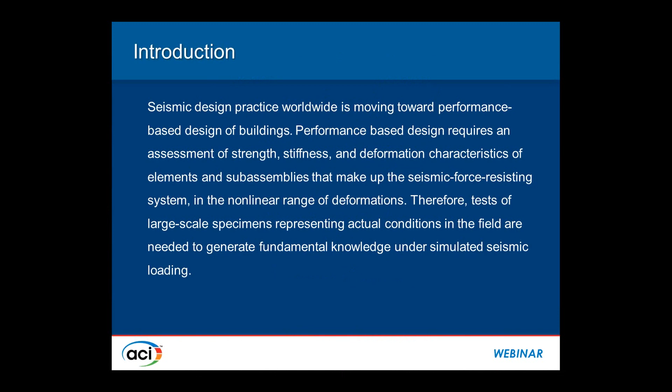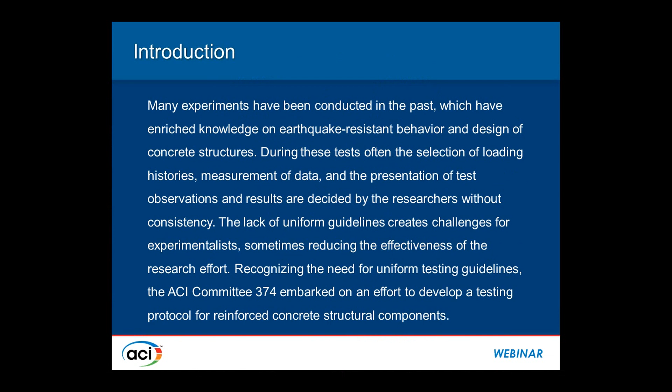Now, it is certainly not intended to restrict researchers to these guidelines. The intent is to increase the effectiveness of the tests and perhaps avoid repeating the same tests, because some information may be missing that could be vital for design and detailing of a specific element, and also to present results in a manner that can be interpreted easily and linked to these performance levels. So the intent is to increase effectiveness while recognizing that each research project is unique and different, and researchers certainly have and should have the freedom to do their tests the way they see fit. But if they do follow some of the recommendations and pay attention, the hope is that the outcome will be more usable by the profession at large.

When we look at testing for earthquake effects, we can essentially group these tests under three different categories. The first one, which forms the basic focus of this document, is testing under slowly applied, incrementally increasing or decreasing quasi-static loads or deformations. The second one is pseudodynamic testing.

Pseudodynamic testing involves a combination of dynamic action, where one conducts dynamic analysis during the test and records or computes deformations imposed on a specific test specimen, applies that deformation in the lab, records resistance or stiffness, then feeds that back into the computer program for the next step of analysis. This is an interactive method of introducing dynamic effects into static testing.

Whereas slowly applied static or quasi-static testing has the advantage of allowing researchers to test large-scale specimens, with given time to slow down or stop testing, make observations, mark cracks, get pictures, record data, and continue. The word slow here implies there will be no inertial effects associated with fast loading or accelerations, and no strain rate effects, as under increased high strain rates, often in the case of blast loading, material capacity goes up and gives a different response. Those two effects are eliminated under slowly applied loads.

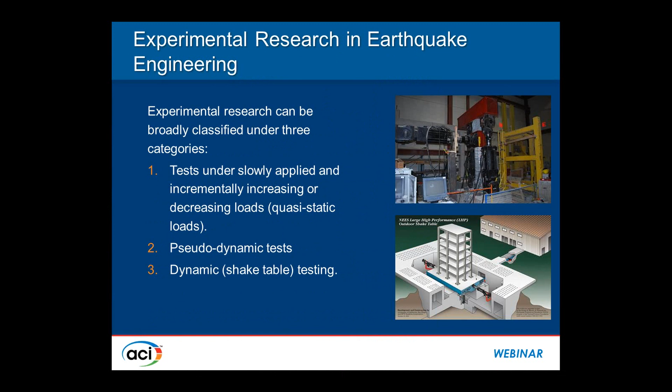At the other extreme of the scale, number three is shake table testing. This is intended to simulate actual ground shaking through shake tables, and that is also a very useful and valid way of testing, with its own challenges. But among these three, we will concentrate on slowly applied quasi-static loads.

Hence, the scope includes testing recommendations for this type of test method. It concentrates on structural elements and does not deal with non-structural elements. Emphasis is placed on characterization of the force deformation relationship.

We often generate a hysteretic relationship under reverse cyclic loading, and this relationship tells you the basic characteristics of the structural element in terms of stiffness, strength, and strength decay or stiffness decay under cyclic loading. I will elaborate on these aspects a little later, but one has to be conscious of that and pay attention to proper recording of the hysteretic relationship.

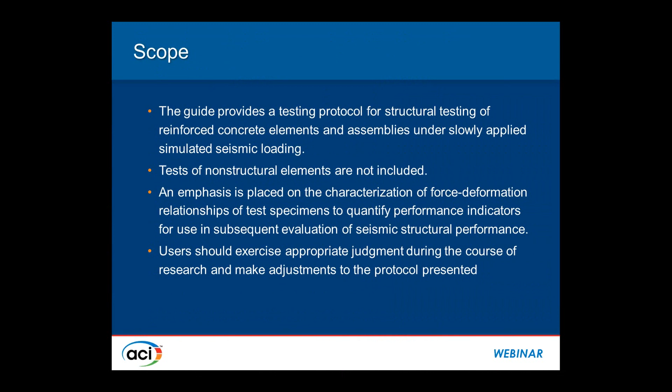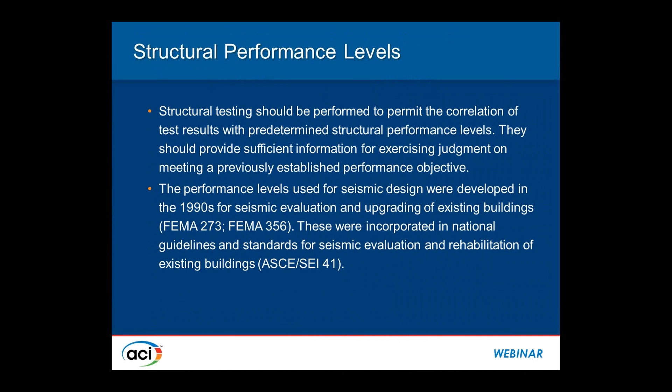I'd like to say a few words on structural performance levels, because this entire test protocol is intended to utilize performance-based design. Performance-based design is an evolving field, but that doesn't mean we haven't established some performance levels, although they are being updated and changed all the time. The committee had extensive discussion on which set of performance levels we should adopt in this document, but it became clear very quickly that there is a set of performance levels already accepted by the structural engineering community, developed in the 1990s and included in FEMA 273 and FEMA 356 documents, and recently adopted by ASCE 41.

These performance levels essentially reflect four different levels of damage states, and each level is associated with the expected use of the building. The first one is operational - the intent is that during and after the earthquake, the building will be operational, typically as it would be in post-disaster buildings like hospitals. You certainly want to continue operating the hospital during and after the earthquake, so this is a valid performance target for designing a hospital, for example.

There may also be immediate occupancy, meaning after the building is inspected following the earthquake, you will be able to immediately occupy it. The next level is life safety - here, as the name implies, we are more concerned with saving lives rather than the structure. The structure may or may not be repairable, but the ultimate aim is life safety.

Obviously, the stringency in design and detailing is a function of how far we want to push the structure, how much additional damage we can tolerate, and there's a cost associated with that. So it's this balance between expected level of performance, stringency in design, and hazard as defined by earthquake intensity that forms the framework of performance-based design.

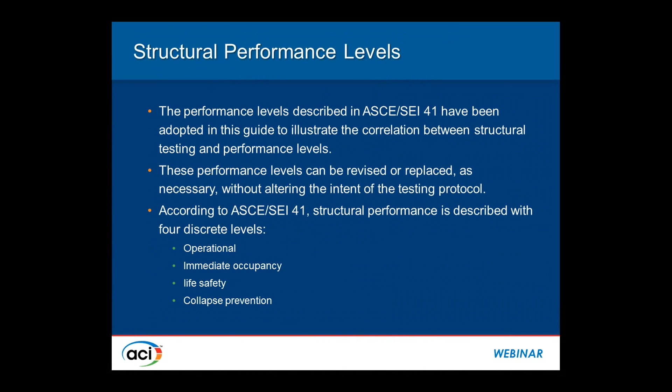And the last performance level is collapse prevention, where the structure becomes essentially unusable but still not collapsing, so that we may be able to vacate the occupants.

It's best to describe this with some numbers. Those of us doing these tests will appreciate these values. Although it's difficult to give exact numbers, I think expressing or relating these performance levels to some well-accepted damage indicators, such as drift ratio, is valuable.

In the case of frame buildings, where there is substantial flexibility in the earthquake-resisting system, the operational performance level is limited to minor hairline cracking, and we certainly do not expect any permanent deformation. This is earlier, maybe around 0.5% drift, within the effective elastic range. Here, when we refer to elastic range, we mean to say the effects of cracking are included, so it's really the effective elastic range.

Immediate occupancy can go up to the onset of yielding, and this is the limit of the effective elastic range, beyond which we start experiencing permanent deformations. Immediate occupancy in a frame building can go up to 1% drift, and this depends on the level of axial load and the type of structural layout. But we're talking about giving an overall feel for these performance levels at this stage.

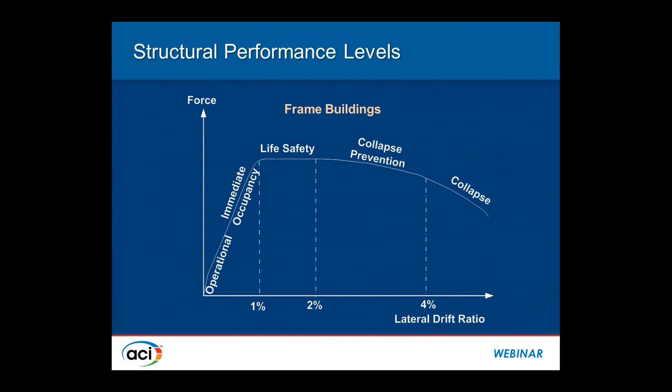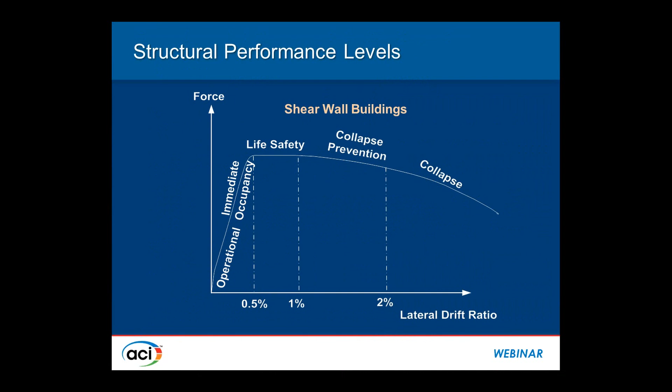Now, when we look at a more rigid structure, like shear wall buildings, shear walls are more stiff elements, and hence there will be less deformation, and yielding will be triggered earlier, as early as 0.5% drift. So the levels of performance typically occur at smaller deformation levels: 0.5% is the onset of life safety, 1% is onset of collapse prevention, and we can go up to 2% drift.

If we know this information before we do our tests, then we know what we're looking for, and we want to display the outcome of the tests in such a way that they can be linked to performance-based design. But if we did not look at some of the performance indicators, then perhaps we will not be able to document our test results. So this is really the intent here.

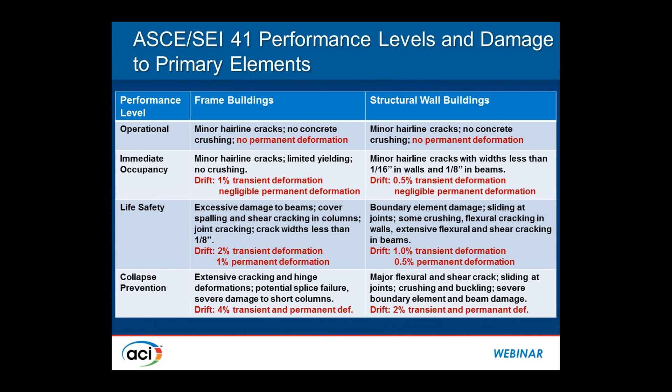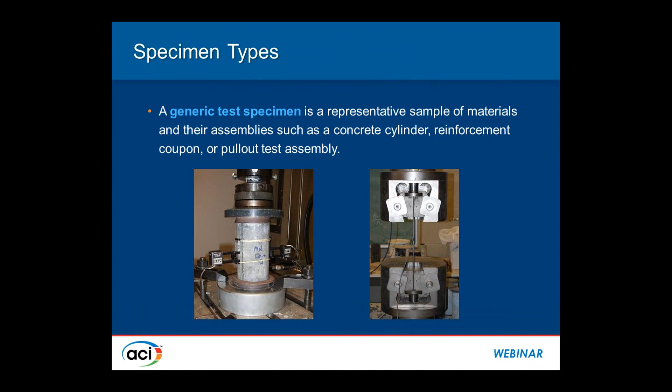In terms of types of specimens, we have categorized these as generic test specimens and specific test specimens. Generic test specimens are typically standard tests that we use to establish material properties. Here you see ASTM standard tests for concrete cylinders and steel coupon tests. But we go beyond that.

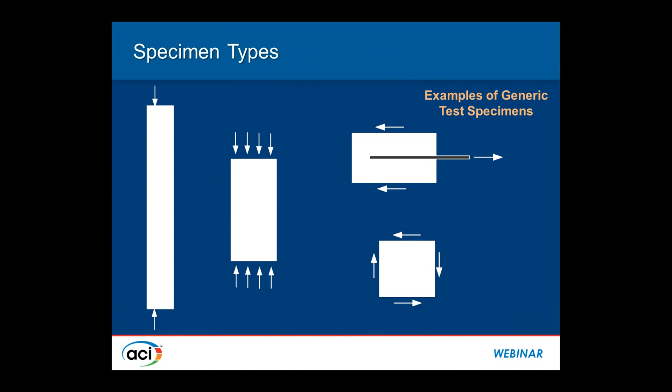Then you can have specimens loaded, typically prisms or even small columns, to study, for example, the effect of confinement. Again, we're looking at confinement effect, not necessarily overall column behavior. The one on the left highlights, for example, a column under eccentric loading. If I want to study behavior of concrete only in the compression zone, I can adjust this eccentricity such that the neutral axis would be on the rightmost edge of the specimen. So these are essentially to focus on specific phenomena in a generic test specimen.

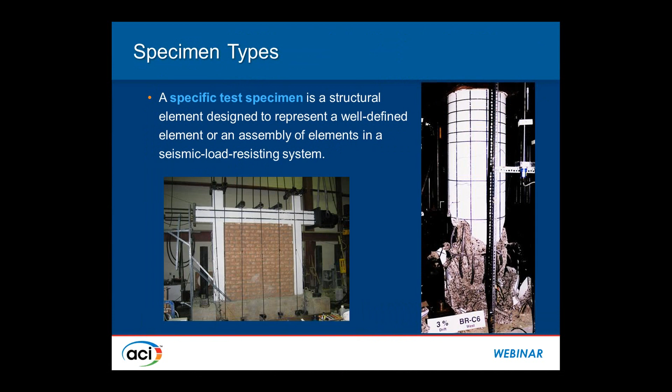Whereas specific test specimens are intended to simulate well-defined elements, sub-assemblies or assemblies. Here you see a small scale, but still relatively large to prevent size effects: a single-story, single-bay frame with infill masonry walls, subjected to reverse cyclic loading. On the right-hand side, you see a column, and this can be a full column or a column between footing and point of inflection, the cantilever portion, or it could be a bridge column. Here, for example, the effect of tie spacing is investigated. So this is done on a specific structural component.

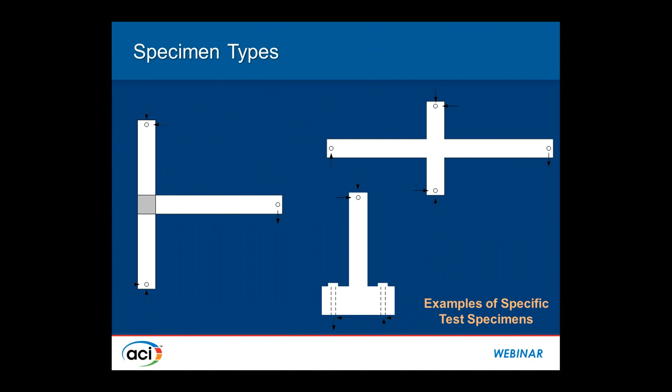Other examples include beam tests, beam-column connections, and there could be shear walls, coupling beams. These are essentially components isolated from the rest of the structure to study their behavior.

Material testing has to be done before the actual structural testing. One needs to know stress-strain characteristics of concrete and reinforcing steel, because this information will be very valuable during and after the test.

In terms of concrete, we take cylinder tests as recommended, often at 7 days and 28 days, but these days may not coincide with the actual test date. Hence it is good practice to establish a strength versus age relationship by testing cylinders at different ages, so that one can predict actual material capacity on the day of structural testing.

But as a minimum, one has to report compressive strength of concrete and yield strength of steel. Obviously, this is bare minimum information needed to interpret test data and assess the results.

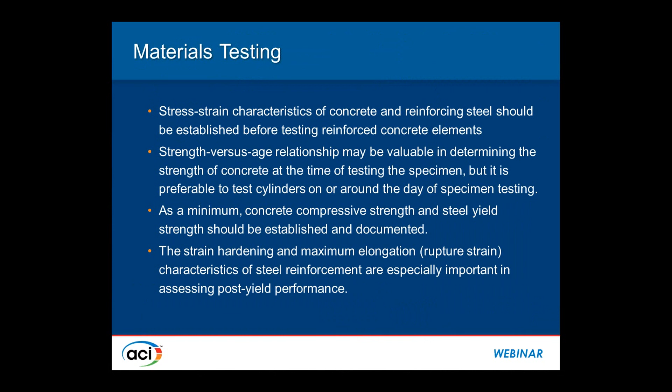The type of tests we are doing for earthquake design involves excessive deformations in inelastic response, and hence it's advisable to capture the strain hardening portion of reinforcing steel. This is important because we will look at plastic hinges during which reinforcement does go into the strain hardening range.

In terms of preparing test specimens, one has to pay attention to the boundary conditions and support conditions, and the way loads are applied and the types of loads that are applied. Obviously, to the extent possible, we should approach full size as much as possible.

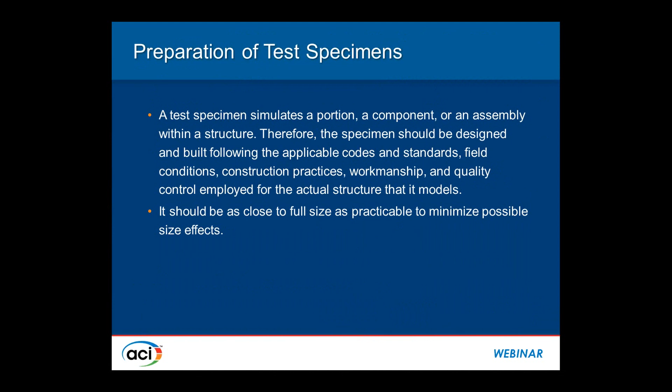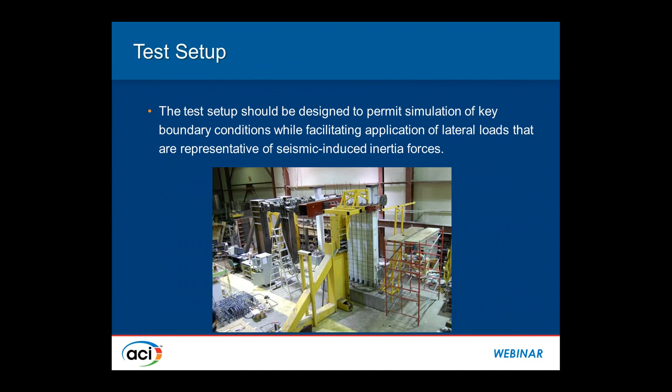The lateral load is applied through actuators, often located where you expect your mass, where the floor is. We often restrain out-of-plane deformations because in a real structure there will be other structural components and perhaps rigid floors, making sure the structure behaves in plane. So these boundary elements and support conditions have to be well thought out and simulated during testing.

Other examples of lateral load application: here you see actuators applying load, and it can either be in force control mode or deformation control mode, as I will expand on later when I discuss loading regimes. You can control these actuators either in force control or deformation control mode.

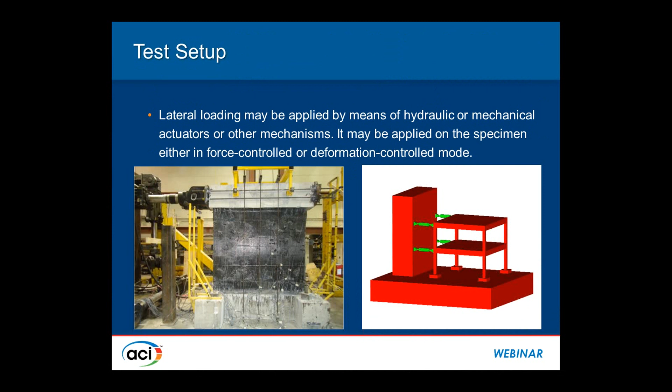You can either simulate a single floor where the inertia mass will be, or if you have a two-story test frame, as you see on the right-hand side, you may choose to apply forces at each floor level as indicated.

One other important concept that should not be forgotten when selecting a specimen, how it is isolated from the rest of the structure and tested with proper support conditions and loading, is axial load.

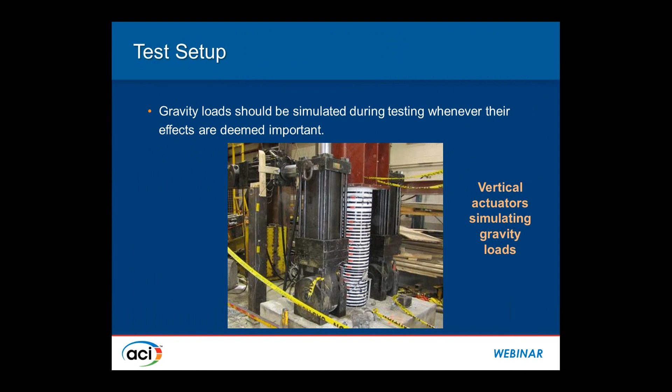Columns obviously have to be tested under simulated gravity load, and this can be done by applying the load with vertical actuators, or sometimes the specimen itself may lend itself to application of vertical pre-stressing. This is a convenient way of applying axial load, so long as one keeps track of changes in the pre-stressing force, because under reverse cyclic loading, one side may lose a little load while the other gains a little. So long as this is monitored, it's a convenient way of applying axial load.

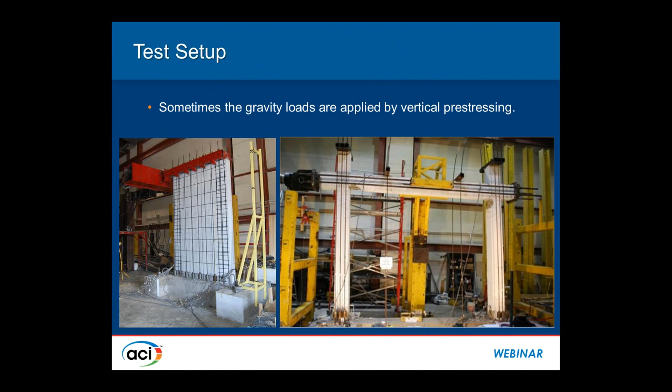Now, axial load does have a very significant effect on performance of these specimens. Where we are concerned with ductility, axial load tends to reduce it, because concrete becomes more dominant in the response, and that has to be considered.

When we look at a typical force-deformation hysteretic relationship, the effect of axial load has to be clearly identified. In a real building, axial load is vertical in nature, but in testing, often we connect the lower end of the actuator to a strong floor and pull the specimen down, which means the axial load direction will change during testing. This is also true if we use vertical pre-stressing to apply axial load.

One has to be conscious of the fact that the axial load inclination will always change, and make sure that when we report the vertical component of axial load, we perhaps subtract the horizontal component of axial load from the force recorded by the horizontal actuator, because the difference is what the specimen is actually seeing.

So with and without this P-delta moment, the behavior will change significantly. If you're presenting moment-drift relationship or moment-displacement relationship, one should remember that this moment consists of two components: the horizontal force times the shear span FL, plus axial force times the deflection, which will vary during testing.

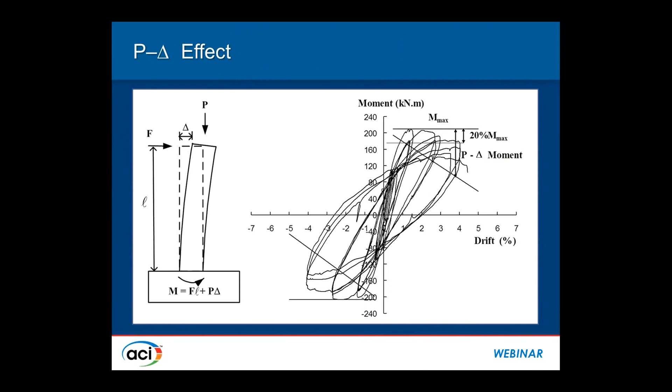If you do ignore this effect and plot only F, there will be a higher rate of strength degradation, which may or may not be misleading, because some of the moment will be used up by P-delta. In other words, some of the capacity of this column is resisting P-delta moment, the rest is resisting FL, and that has to be identified.

In terms of instrumentation, we have to instrument the specimen such that the performance indicators we've been talking about are clearly obtainable from these tests. If we talk about drift as a performance indicator, one has to obviously measure displacement, from which we can get drift.

One common mistake is not capturing deformations associated with anchorage slip or the extension of reinforcement into the attached member. If this is a column, the reinforcement extends into the foundation, and when plastic hinge forms and yielding occurs, yield penetration takes place, and the reinforcement inside the footing starts elongating, causing significant softening in the member. This has to be recorded by placing vertical LVDTs as close to the bottom section as possible, because this extension of reinforcement, and hopefully not complete slip but some local slip, will result in a wide crack at the member intersection, and that will certainly affect your drift.

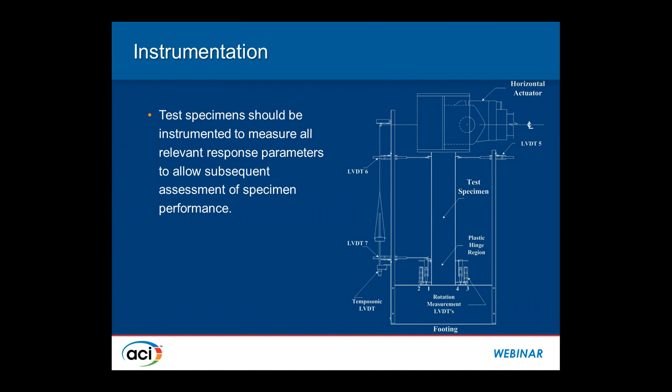So plastic hinge rotation can be total rotation, including flexural deformations and reinforcement extension or anchorage slip.

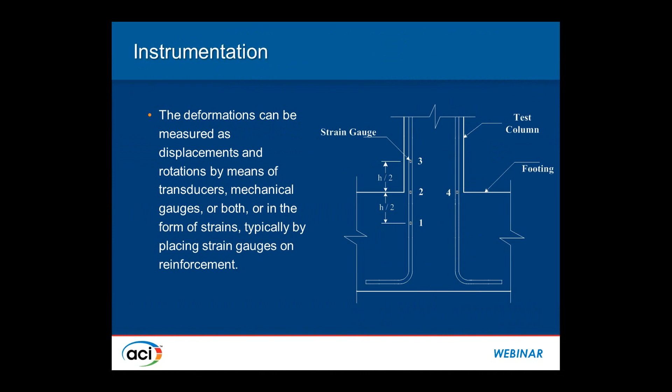Strain gauges have to be used carefully. They are very valuable gauges, easy to use, especially on reinforcing steel, but one has to be aware that they pick up localized strains, and we should not place over-reliance on these strain gauge readings. As valuable as they may be, they can at times be deceiving. But it's always good practice to provide strain gauges, one at the critical section and then at least one or two above and below, to monitor yield penetration into the adjoining member or within the member itself.

Whether these are rotation transducers, displacement transducers, cable transducers, or different types of deformation measurement devices, or strain gauges, they have to be monitored continuously, and the best way to do that is to use a data acquisition system. This system should collect load information as well as deformation so they can be correlated during testing.

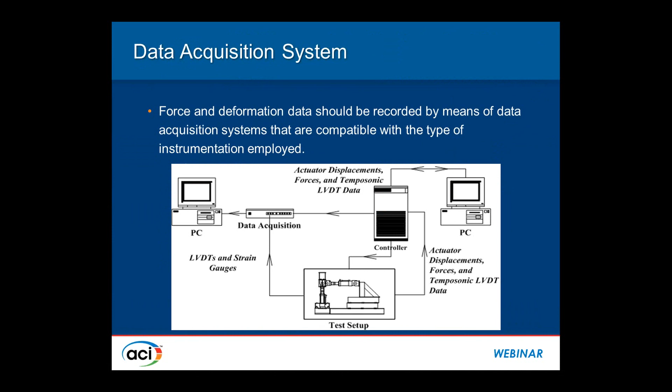In this case, you're looking at use of double data acquisition for a given specific test. At the end, force-displacement relationship provides the single most important outcome of a test under reverse cyclic loading, and this relationship, often provided as a hysteretic relationship, consists of hysteresis loops.

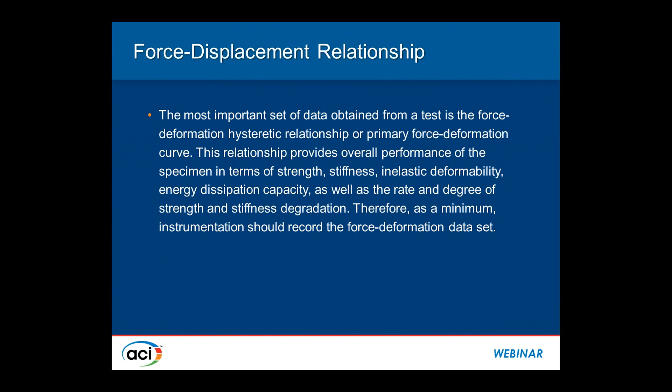The characteristic of this loop will tell a lot about strength, stiffness, and deformability of this member. In fact, the shape of the hysteresis loop will also shed a lot of light on damage and performance of that member. So it's very important to keep good track of this hysteretic relationship and record it as accurately as possible.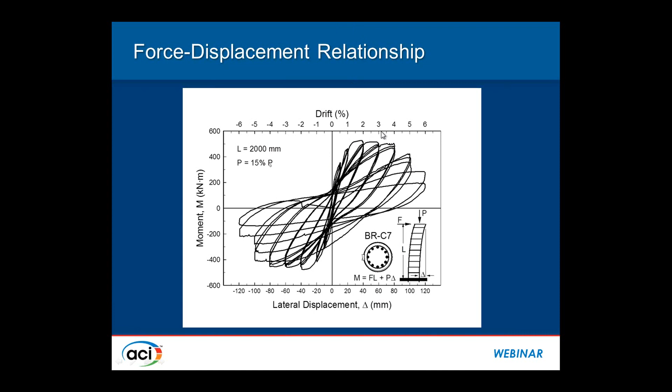Correlating this back to the performance indicators we talked about, one can see that if we are in this range, it's an operational performance level, and this is immediate occupancy performance level immediately after that, and then we get into life safety and then collapse prevention.

So if we do record these corresponding drifts, the outcome of the test will be correlated with these performance levels. And during the execution of the test, the load is applied slowly, slow enough not to cause inertia effects and strain rate effects, but it should not be too long in order not to start some immediate creep action.

But usually this is a safe range. A test completed within a couple of hours, even half a day, or even a whole day, would comfortably fall in this acceptable range.

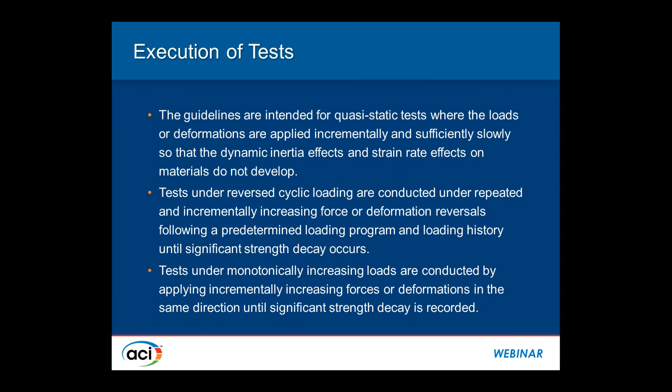One has to be careful as to whether the test is conducted under force control mode or deformation control mode. Initially, one may choose to apply it in force control mode up to yield. Typically, we apply half the predicted yield force and cycle it two or three times. And then when we go past yield level, because yield by definition means deformation beyond which resistance or deformations increase with very little resistance, then it's difficult to control load, and one has to use deformation control in that range.

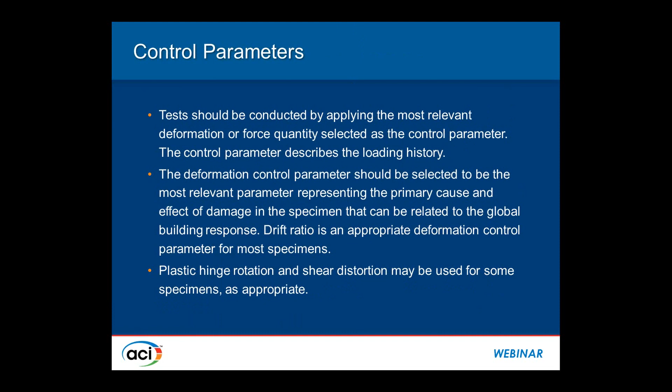During testing, the control parameter is very important. Again, we should select the control parameter that can be linked to performance levels. Here, the commonly used control parameter is drift, as would be the case in typical flexure dominant members, but one can choose to use, if it's a shear dominant test, shear yielding or shear capacity as a control parameter. But often, if you are testing a well-designed specimen, drift will be the preferred performance indicator, the preferred quantity that can easily be linked to performance indicators, which are linked to damage levels.

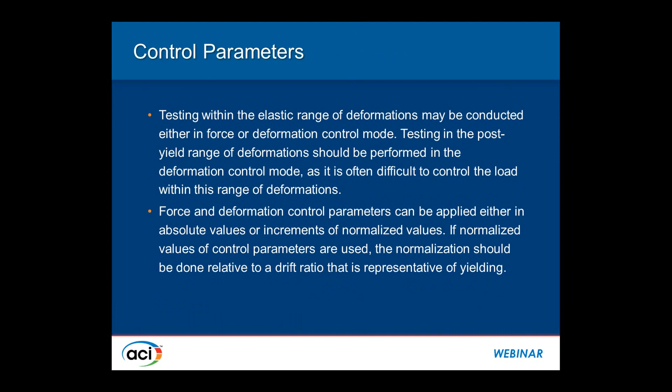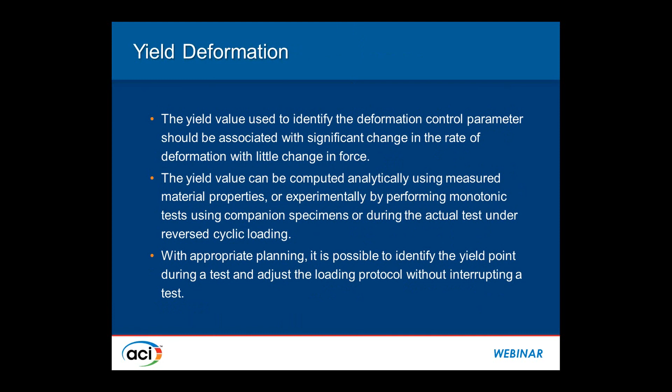This brings up the challenge of defining yield deformation, because in a reinforced concrete section where you may have different numbers of bars at different locations, yielding may be progressive, and hence there may not be a fixed yielding point. It may be gradual, and yet for columns and beams, you can pretty well identify member yielding as opposed to section yielding. Member yielding would be if the overall resistance of the member remains constant as deformations are increasing at a faster rate. That is the point to capture, and this can either be calculated prior to the test based on material properties established by standard testing, or it can be captured during the test. There are different techniques available to help us identify yield deformation.

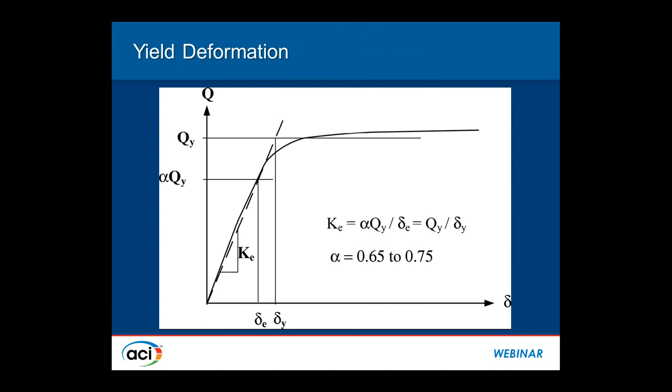One such technique is shown. We all know that yield level and ultimate capacity are close, and one may use nominal capacity expressions to analytically predict this yield force level. And then if we draw a line between the origin and anywhere between 65 to 75% of this calculated capacity, where these two lines intersect is a fairly good estimate of yield displacement. One can fine-tune this yield displacement during testing, or even better, if there was earlier a monotonic test done, then you would know fairly accurately what the yield level is.

This is the onset of inelasticity. The capacity is dictated by the end of the inelastic range, which is when the specimen is beginning to fail. Typically, researchers have used in the past 20% strength decay as an indication of member failure, but that by no means indicates structural failure or building failure. In a multi-story, multi-bay structure, individual elements may undergo excessive strength decay, but the structure itself may not experience that.

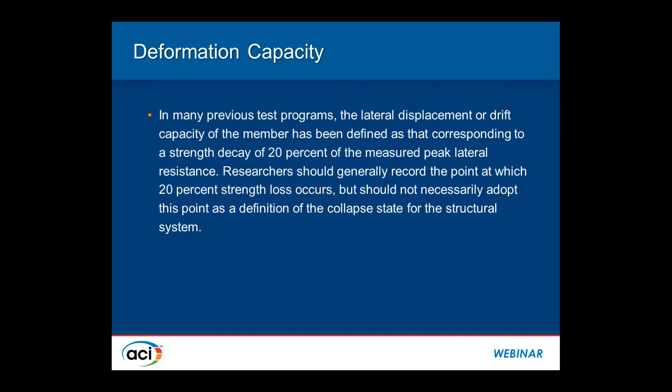Unlike bridges. In bridges, there's little redundancy, especially if you go to the extreme case of having a single-bent bridge. 20% strength decay may be enough to bring the bridge to an unstable condition, whereas in buildings, 20% strength decay is tolerable before we declare that a member has failed.

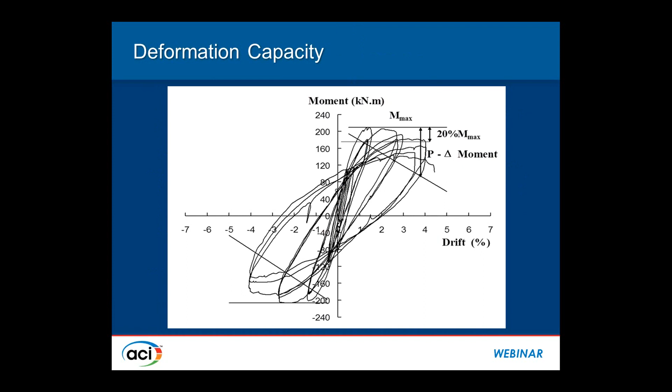And this has to be indicated on the hysteretic relationship. This 20% decay is often associated not with the first cycle, but the second or third cycle. If the member cannot maintain its strength during the second and third cycles without experiencing any more than 20% strength decay, then it may be an indication of a failure point.

But it's advisable to go past this 20% strength decay to see the collapse behavior of the specimen, so it's recommended in the document to go at least 50%. But sometimes you may get a more ductile behavior than anticipated, or the stroke capacity of your actuator may not be sufficient.

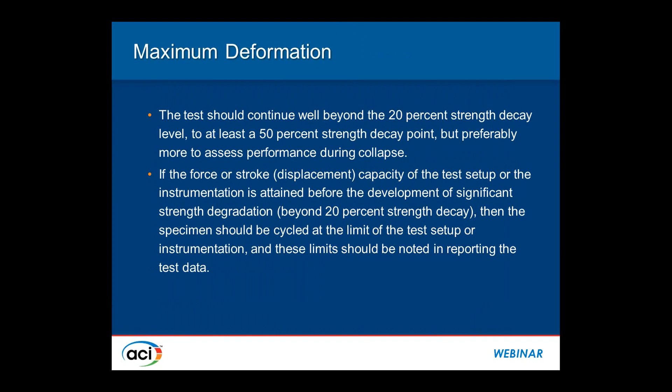Then one may stop at this strength decay point and then keep repeating the cycles until failure occurs.

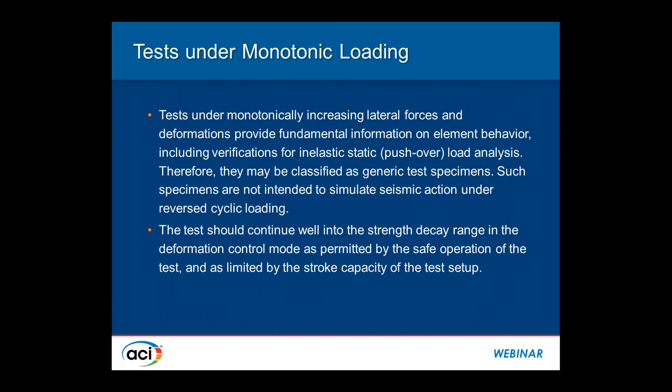I'd like to say a few words on tests under monotonic loading, because even though emphasis is on reverse cyclic loading, monotonic load tests provide valuable fundamental information. This is analogous to pushover analysis, and it captures the primary curve, giving initial elastic and post-yield characteristics, as well as strength decay onset.

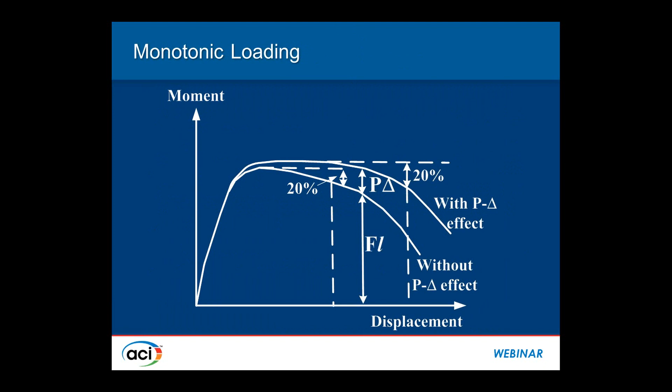So we sometimes conduct monotonic tests under incrementally increasing loads. We simply push the specimen laterally when it has axial load, often constant axial load, and then record the 20% strength decay with and without the P-delta moment.

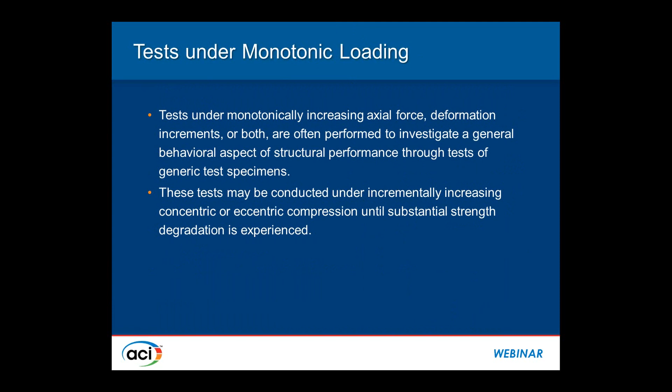These tests capture important phenomena in terms of behavior of concrete, in terms of toughness and bond slip characteristics, and hence may have to be done in a well-designed test program prior to reverse cyclic loading.

When we talk about reverse cyclic loading, often we test specimens in a unidirectional manner, and the control parameter corresponds to yield drift. The first two cycles are elastic cycles, which can be done in force control mode, followed by deformation control mode at yield, 2 times yield, 3 times yield, until we experience significant strength decay.

Some tests, in fact maybe more tests in the past, were done under 3 cycles rather than 2 cycles, but the committee decided that may be punishing test specimens too much, so the decision was to recommend 2 cycles or a minimum of 2 cycles. But if the researcher feels 3 cycles are justifiable, that can certainly be done.

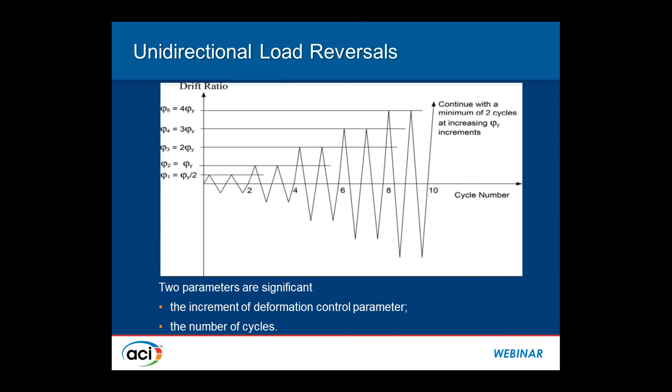Also, sometimes we do tests for other purposes, like developing hysteretic features, and we want to know the effects of small cycles after large cycles. So this loading regime may be changed by the researcher, but for basic performance-based design intentions, we essentially start with drift and apply increments of drift, identifying strength and deformation characteristics at increasing drift levels.

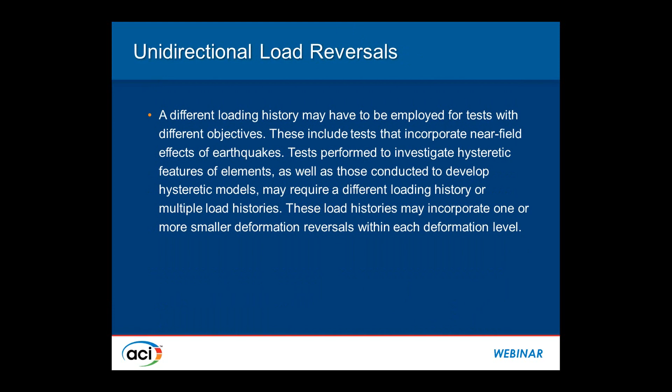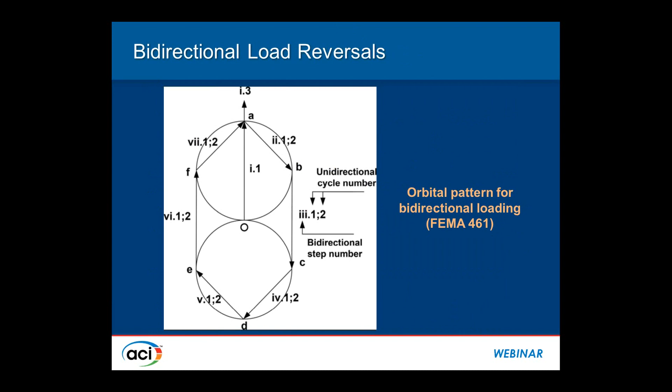If we want to apply 2 or 3 cycles, we follow the same pattern, but next time when we come to point F, we want to increase the deformation level, so A becomes twice the previous displacement level, or maybe 1% drift instead of 0.5% drift, and then we continue applying the next 2 cycles. So this is how bidirectional load reversals can be applied.

Now, correlation of tests with performance levels is of utmost importance, and the performance indicators I mentioned earlier are meant to reflect global behavior, but we're testing individual members.

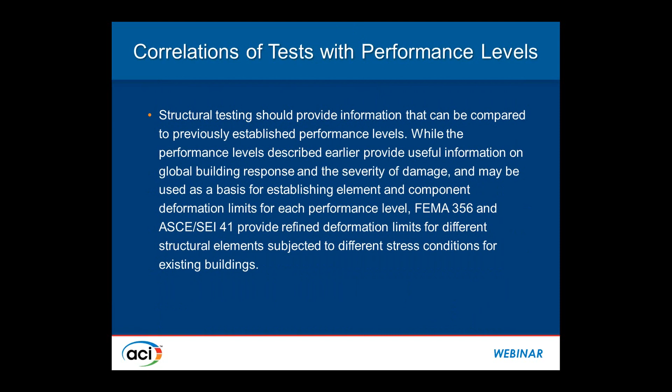The ASCE 41 document recommended tables in which, for beams and columns, plastic hinge rotations are specified for various performance levels. This could be a very good tool, even though they were meant for existing buildings, and one has to be careful, but they can be used as a guide.

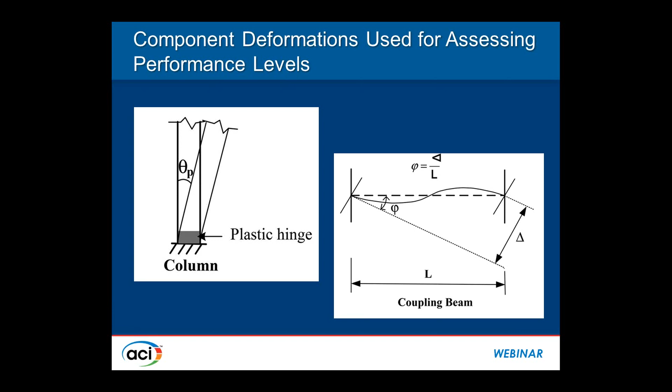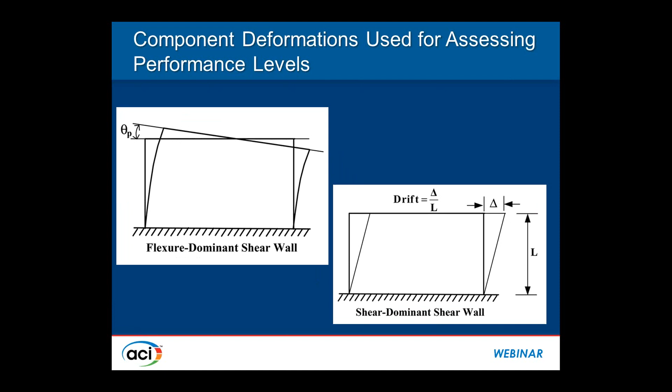For coupling beams and for shear-dominant shear walls, drift is recommended. If we know how we're going to correlate test results to performance levels, then we make sure we capture these deformation quantities. This is the intent behind these guidelines - you should record the relevant deformation components so it will be easier to correlate with performance levels.

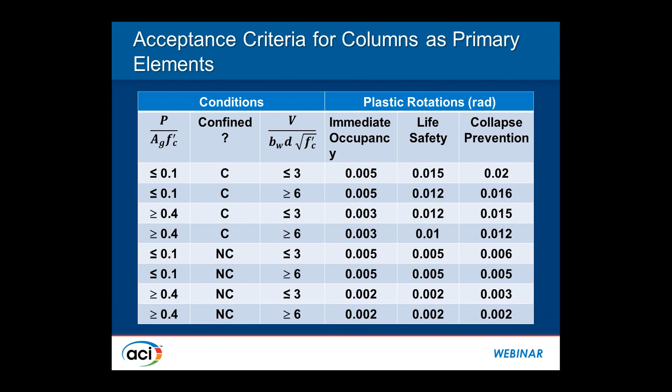Here's a sample table, meant for columns as a function of axial load, whether confined or unconfined, and the shear span and significance of shear stress, even if the member is behaving with lateral load. As you can see, for immediate occupancy, life safety, and collapse prevention, different rotations in radians are specified. If you measure these with the vertical LVDTs or transducers indicated, this information will be readily available to link with performance levels.

Finally, I'd like to say a few words on documentation and reporting. We all know that different researchers and different research programs are done in different ways, and they're reported differently. Depending on what the objective of the test is, this is how it in fact should be. But specifying some basic guidelines hopefully will help unify the reporting procedures so that when somebody is looking at these test results, they'll be able to extract information easily and link it with performance levels easily.

This is the intent. Obviously, we need to report specimen geometry, including cross-sectional characteristics, reinforcement, detailing, plan and elevation views, and then how the specimens were prepared. If it's a column cast horizontally, one has to note that. So casting position and curing have to be reported. And then instrumentation, locations of instruments where these various deformations have been measured, and then boundary conditions and support conditions.

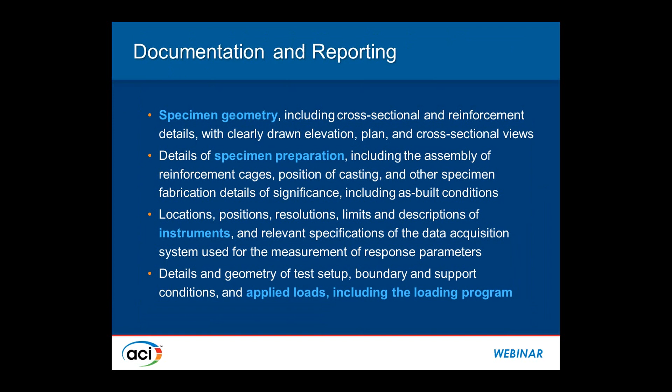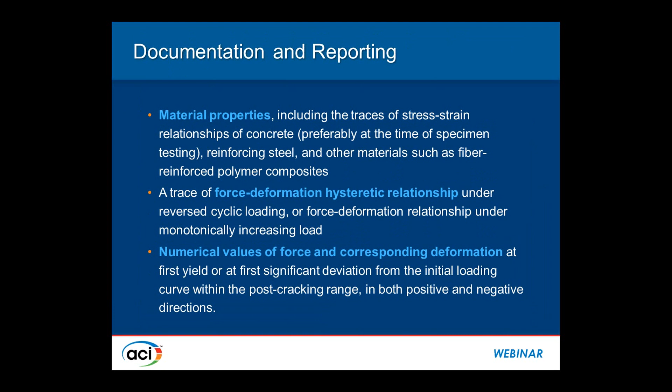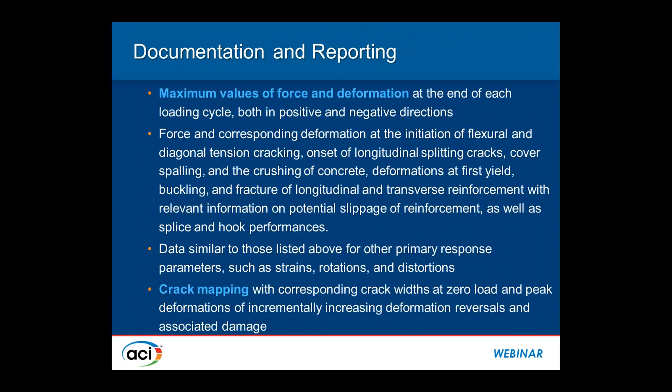In material properties, we already emphasized stress-strain relationships of concrete and steel. Force deformation hysteretic relationship is the single most important outcome of these tests, and they have to be very carefully documented, not only graphically, but numerical values and corresponding deformations should be provided. At peak loads, force level and corresponding displacement would also help if somebody else wants to plot these deformations. Maximum values, yield values, onset of cracking have to be marked on these hysteretic relationships, and cracks have to be marked on the specimens, and their crack widths recorded, along with other observations made during testing. These observations have to be recorded because they can be quite valuable.

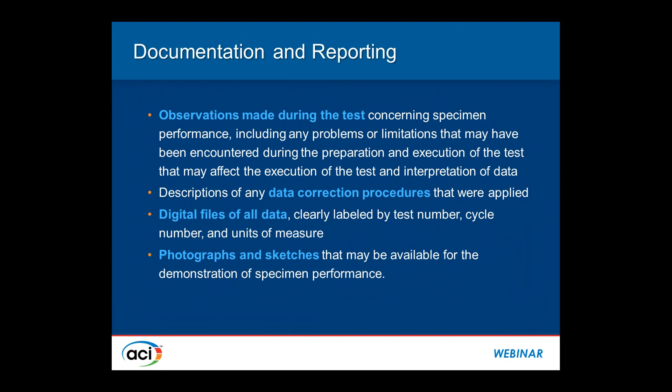Subsequently, when people look at the results, they don't have the benefit of witnessing the test itself, so these observations, well documented, will be quite useful. And if there is any correction introduced to data for whatever reason, if there are errors that one suspects, they have to be recorded along with digital files that can be reprocessed by others. And finally, photographs and sketches are quite valuable to capture overall behavior.

Thank you for your attention.